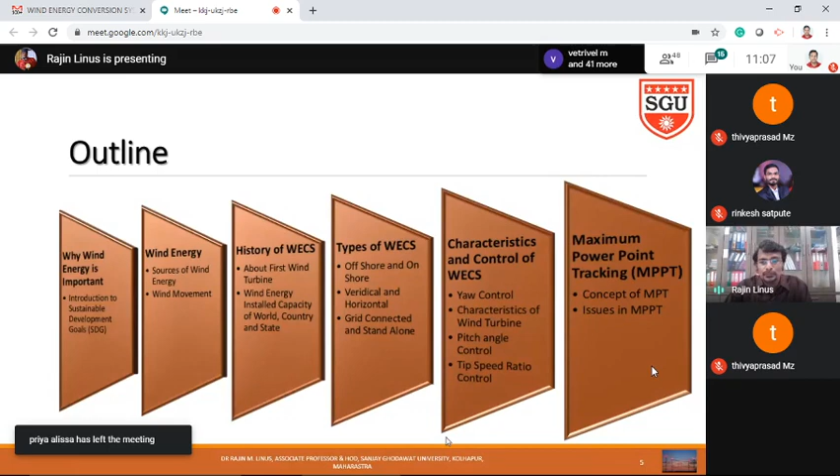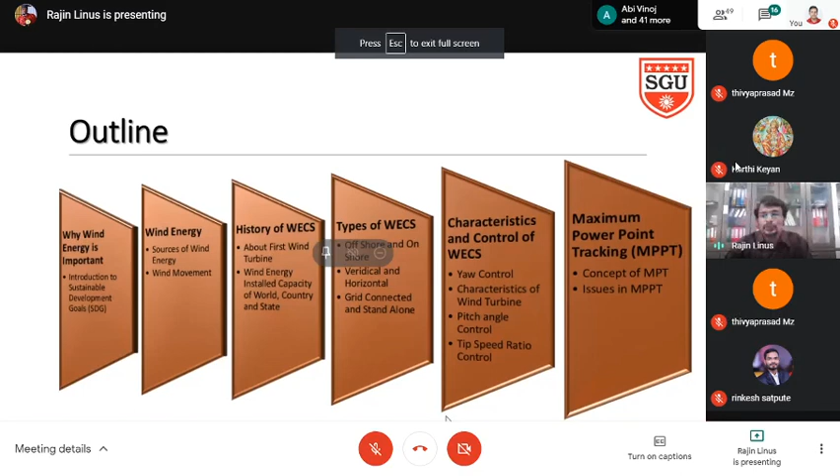Finally, the concept of maximum power point tracking and the issues in it. This MPPT is mostly related to the research point of view, so I have given a small introduction to what is meant by MPPT, and more literature is available for understanding different MPPT methods. Otherwise it would need a separate lecture, so I have confined it to some basic topics.

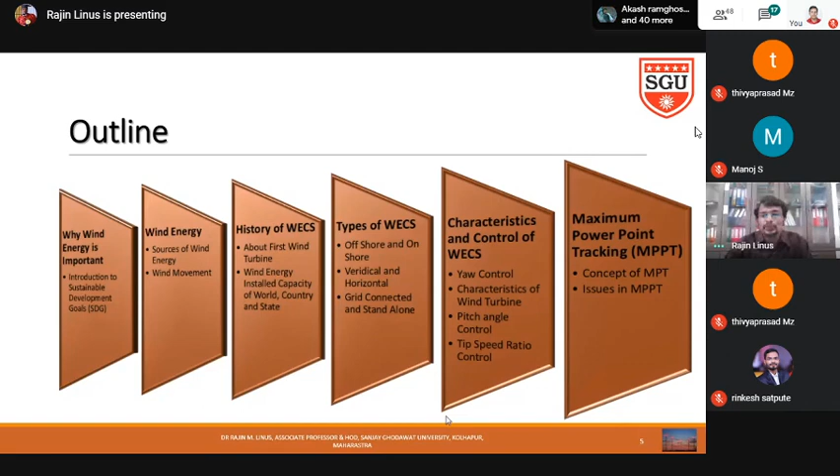First we should know why wind energy is important. We know the United Nations General Assembly is a combination of different countries joined together. They frequently meet to understand what issues exist and how to solve them. Even COVID issues were discussed there.

In 2015, they fixed around 17 sustainable development goals, in order to improve our world due to environmental and climate change issues. This includes reducing poverty, providing good food, and ensuring everyone gets electricity - different parameters are there. If you search Google, you can find all 17 sustainable development goals.

Among those, the seventh goal is clean energy, renewable energy. Its aim is to ensure access to affordable, reliable, sustainable, and modern energy - how much energy we can produce and give as clean energy. That is the seventh goal.

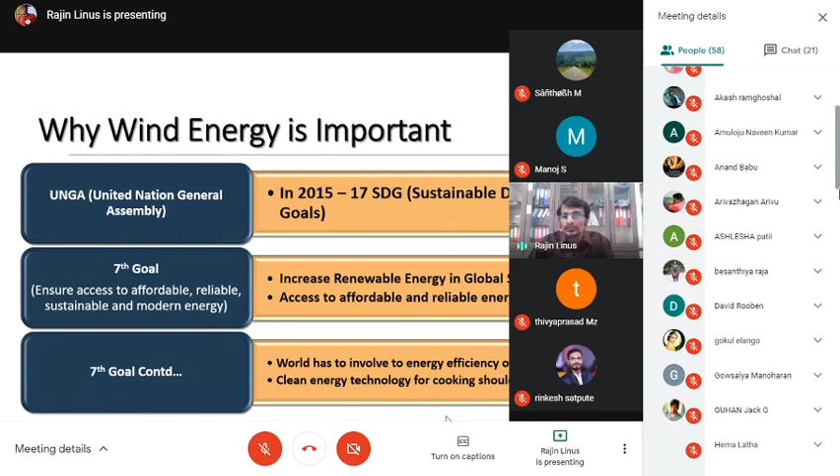As per the renewable energy point of view, they are expecting to increase the global energy share market by 2030. As per the renewable energy side, people are targeting that by 2050, 85% of power consumption should be by renewable energy. Nowadays electricity is very difficult to afford, so that type of thing we can avoid. Everyone should get the electricity, affordable and reliable energy by 2030.

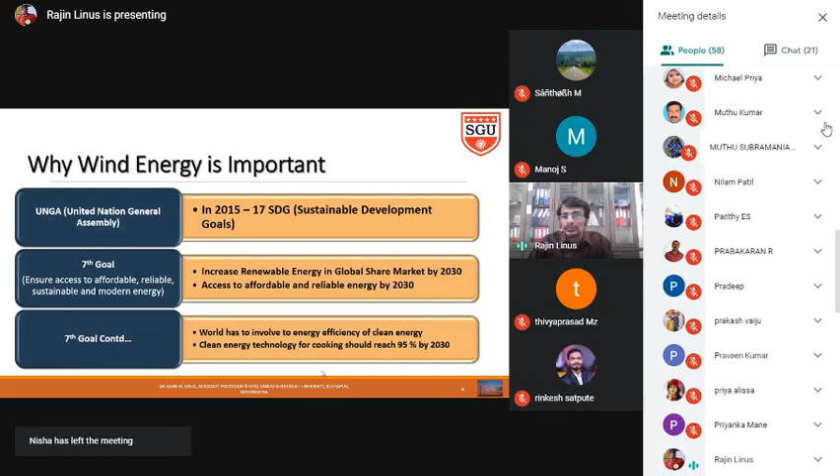Remaining can be taken from the grid, so that the scarcity of electrical supply also we can avoid. The world has to improve energy efficiency of clean energy. The efficiency is also an important factor for getting energy. How will we improve the efficiency? For example, as per the wind energy conversion system, we are giving input as wind, and we have to get good efficiency output. For that, people are using maximum power point tracking and different strategies as well.

Then people are targeting that by the year 2030, 95% of cooking energy should be by use of clean energy. So these are all the main impacts behind that, and that is the reason why I have also chosen this as a research area, and for today's seminar I have fixed this as the topic.

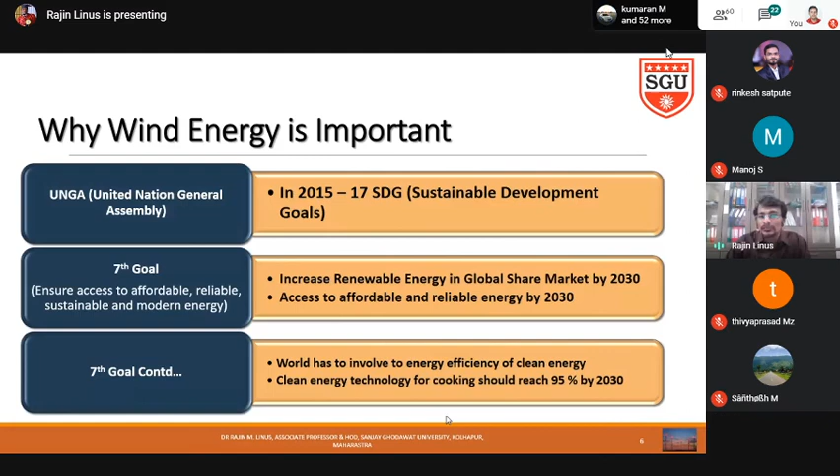Then, motivation towards this renewable energy system. I already told you about sustainable development. Why do we need this sustainable development? We already studied chlorofluorocarbons in 12th standard - fridges and air conditioners will produce fluorocarbons, and due to that the ozone layer is affected. Everyone knows this, but from a basic point of view, I am explaining this also.

We know the sun generates harmful UV rays. These harmful UV rays can be filtered by our ozone layer. This ozone layer will filter harmful UV rays and provide light for our survival, so the filtered light is transferred to our earth. This is the normal procedure - I don't want to go beyond the ozone layer and all that. The ozone layer has many chemical compounds, and these compounds filter UV rays.

If suppose the ozone layer is not there, these harmful UV rays directly attack plants and human beings also. Due to that, skin cancer and different types of skin issues and other health issues will happen. So now what is the problem? We are using electrical appliances which generate chlorofluorocarbons. Then volcanic eruptions will be there - hills and all will vomit heat and fire outside due to the metal content inside, and due to that we get a lot of smoke outside in the climate.

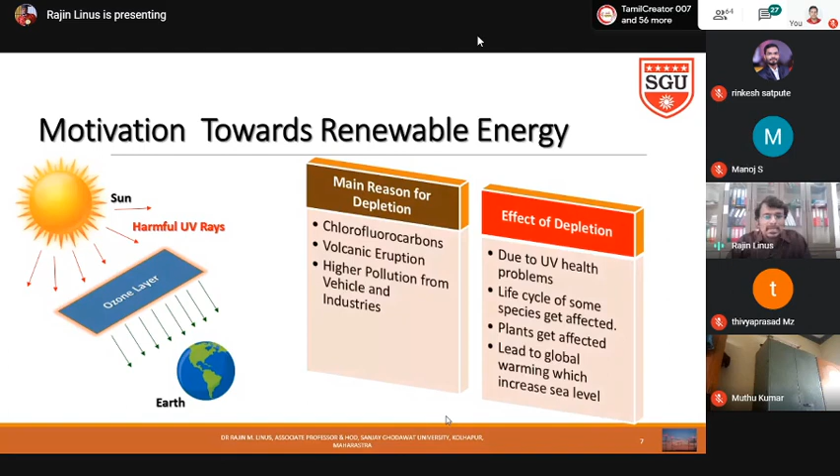So that is why I have chosen this motivation for wind energy as today's lecture. Then about wind flow, there is an interesting method. Maybe some of you are aware of how wind flow happens. What is meant by wind flow? We used to say changes of airflow between places is called wind flow.

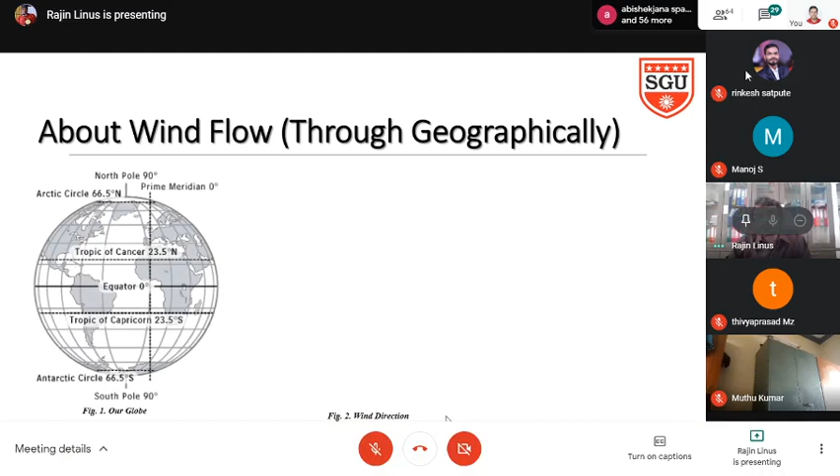For that, I want to show the geographical representation of our globe. North pole at the top, south pole at the bottom. If you ask more about geography, I am not so strong in it, but for explaining wind energy, I am explaining this. In between, the equator will be there - equator, north pole and south pole. Now just for understanding, I have split it to show north pole and south pole alone, with the equator in between. Assume morning time, the sun will be there.

So the sun will start to radiate heat. What will happen? This equator place will be heated up more compared with north pole and south pole. Once again, due to the sun's energy, the equator will heat up more compared with north and south pole. So the air, which contains liquid molecules and water molecules, everything will be there.

Once this water molecule is heated up, the higher density air will be at ground level. Once it heats up, warm air will come up, above the high density air. So what happens? This warm air will start to move towards the north pole and south pole.

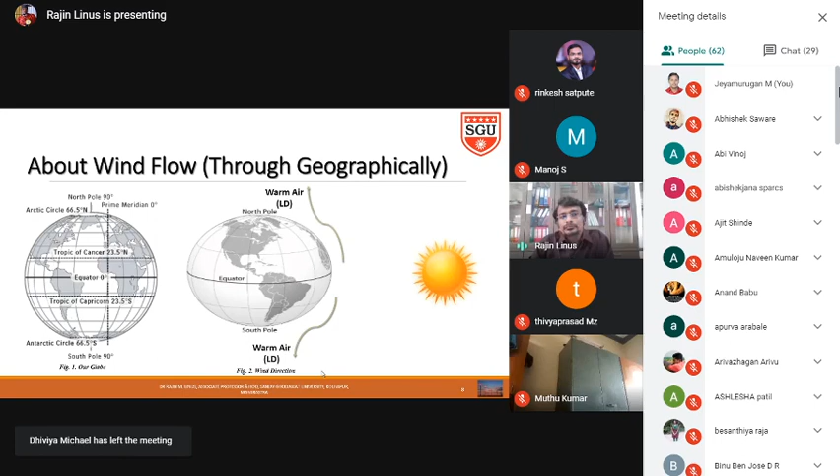I will show you very clearly. So now this is the case - once this heated up warm air... sorry, warm air will move from equator to north pole, and from equator to south pole.

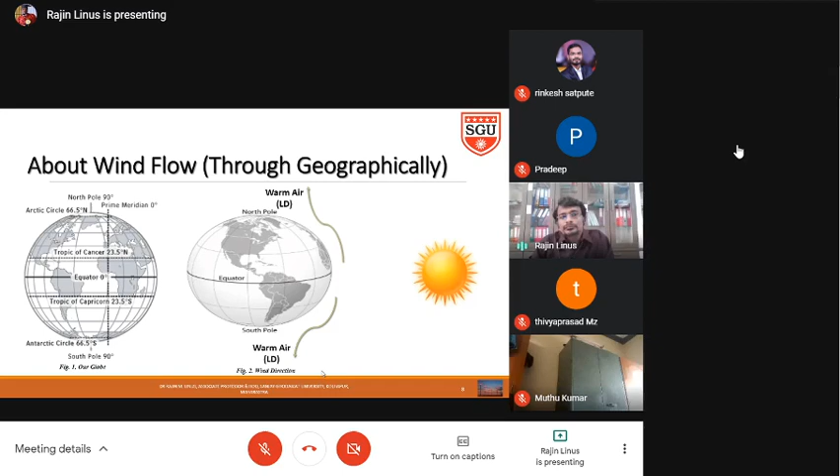So what happens? There will be a space created. This space at the equator will be filled by cool air from the north pole and south pole. Cool air has higher density; warm air has lower density. That's why it is mentioned as LD and HD. So cool air will move towards the equator.

Once again, once heat is generated from the sun, the equator side will be heated up. All the air content will be warmed up, so it will be low density. As the lower density air behaves like electricity - higher potential to lower potential - it will try to move towards north pole or south pole.

So now the equator is vacant, and that vacant place is occupied by cooled air from the north pole and south pole. So air will flow from equator to north pole, or north pole to equator, and so on, based on environmental conditions. This is the process of wind flow - this is why wind flow happens.

This is one factor. Second, nowadays in our area we can see hills everywhere. Hills will block the airflow, and due to that also wind flow will happen. This is another way wind flow is generated - based on geography.

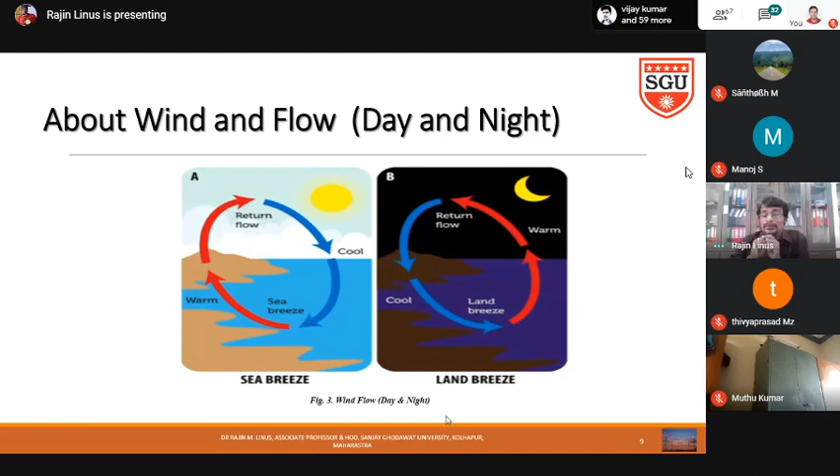One is, due to the geographical point of view, the equator will heat up more. Due to that, there is a wind flow. Then this is the case during the day and night time: due to the sea breeze and the land breeze, airflow will be there. Then another one, due to the hills and everything, airflow will be blocked and it will be deviated. So this is the case of wind flow in the day and night. I hope you understood what is meant by wind and how the flow will be.

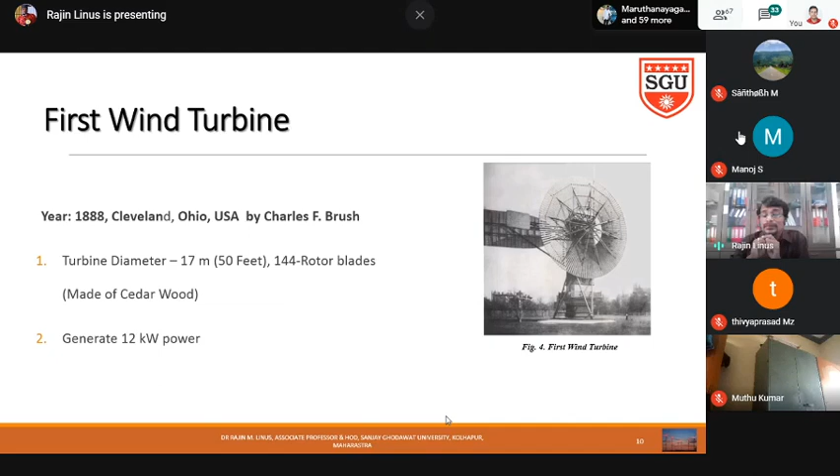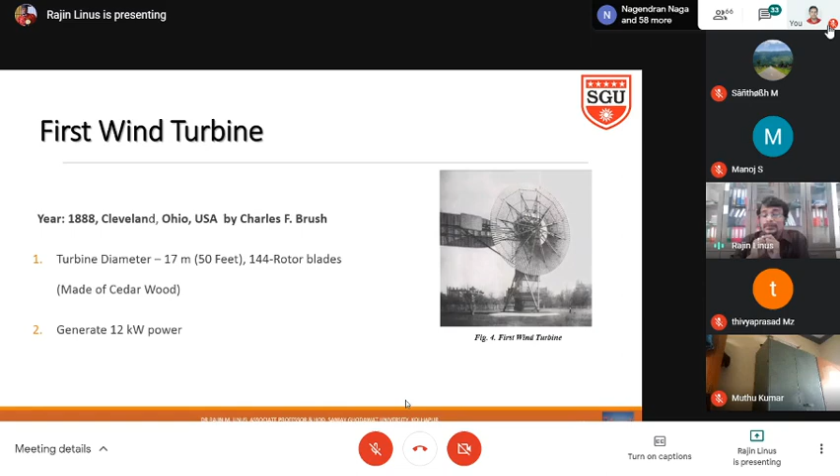Once people invented it, from this we can understand the disadvantage. From a construction point of view, it is very difficult. Even three blades take more time to elevate, and here we are using 144 rotor blades, the diameter is 17 meters, and we are getting only 12 kilowatts power. So once invented, people started to think about the negatives, and they started to introduce different things.

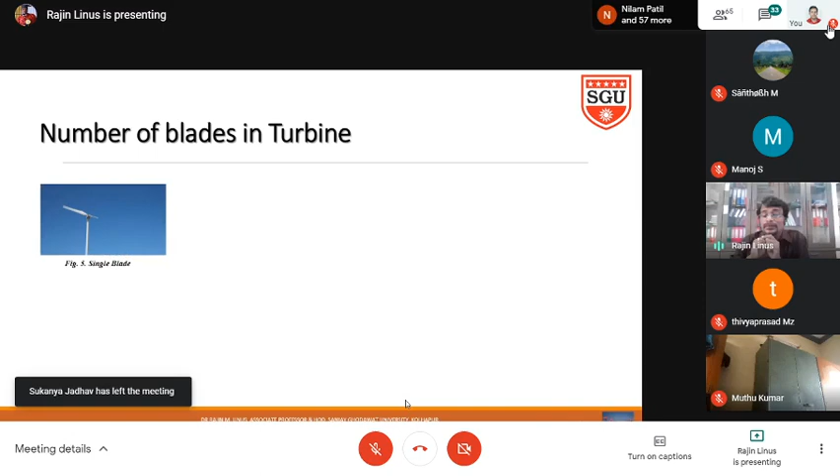Based on the number of blades in the turbine, first people thought of a single blade. Why can't we use a single blade? What is the problem? Analyze it. With a single blade, when it rotates, there will be centrifugal force issues, and balancing will be the problem. Due to that, they have to take special care about the construction of the base of the wind turbine. That is one case.

Second one is, if we have only one blade, we will not get more power. Wind power is more, and we have to extract maximum power. For example, an induction motor is there, we are giving input, output we are getting

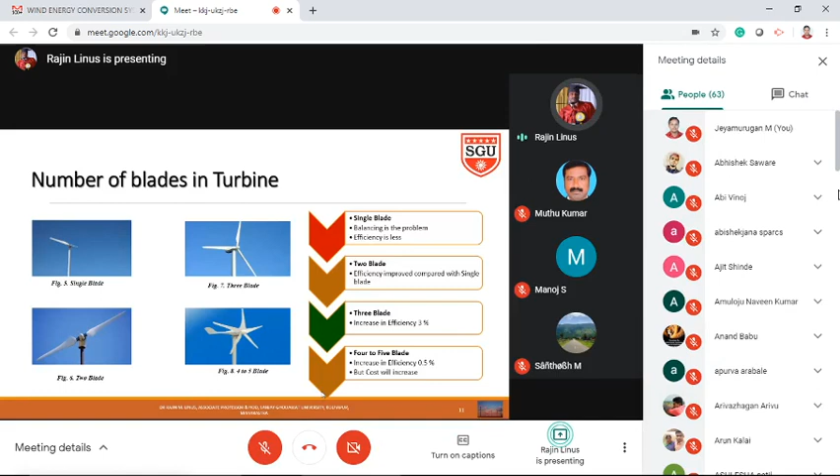only we have 3 blades. The reason is, if I go from 3 blades to 4 blades, the efficiency improvement is only 0.5%. But at the same time, the cost of installing one more blade is more. That is why for large wind turbines, people are not using more than 3 blades. But for smaller wind turbines, no issue. They can use many blades, and cost is not much of an issue.

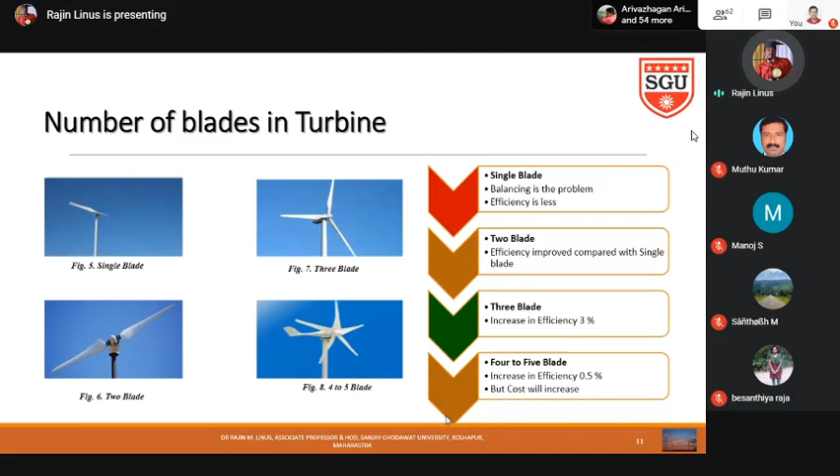So once again to repeat, the first wind turbine with only one blade had the problems of less efficiency and balancing. Second, they somehow recovered the balancing problem, but they thought they could improve the efficiency further. That is why they went for a third blade. With 3 blades, they improved the efficiency by 3%.

Then they thought of implementing 4 blades. The problem was the efficiency only increases by 0.5%. They were not able to increase it further, and at the same time the installing cost was more. That is why they have chosen 3. Nowadays we can see all wind turbines having 3 blades.

Then the world cumulative installed capacity of wind turbines, we should know. See, from 2000 to 2023, with expectations also. Initially, the world cumulative installed wind capacity was only 17 gigawatts. Then gradually it increased. In the year 2015, 64 gigawatts of additional new installation was done, so total 433 gigawatts. Then again 55 gigawatts.

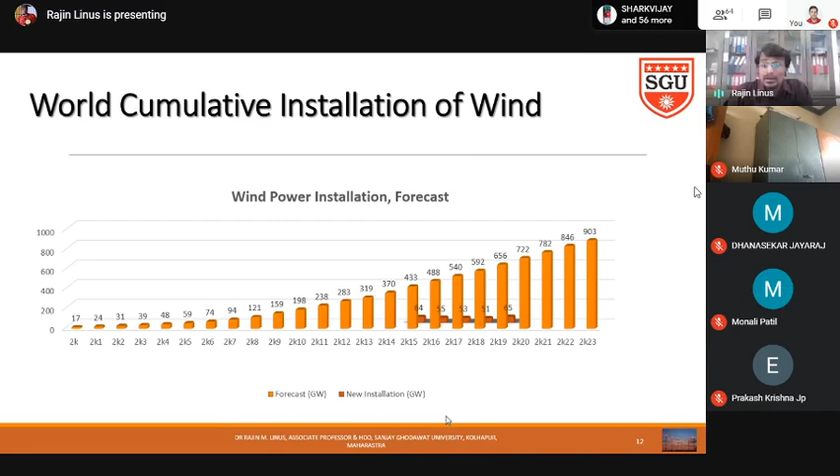Like that, they have increased new installations also. People are expecting that in the year 2023 there will be 903 gigawatts installed capacity in the entire world. So there is that much scope for electrical engineers also. Then region-wise installed capacity: Americas, Europe, Asia Pacific, Africa and Middle East.

When compared with other cases, Asia Pacific has 261 gigawatts of installed capacity, 44% of total installed capacity. Why is this varying? As I have told already: the equator, movement from the equator to the north pole and south pole, different areas having different environments for wind flow. Due to that, the changes are there.

If you go to our Tamil Nadu, we are the first. Tamil Nadu is the first in installation; I will show it in the next slide. If you go to Kerala, the installed capacity is very less. That's not the problem of the state's people, only the problem of wind flow. So these are the things we should know, how much they did.

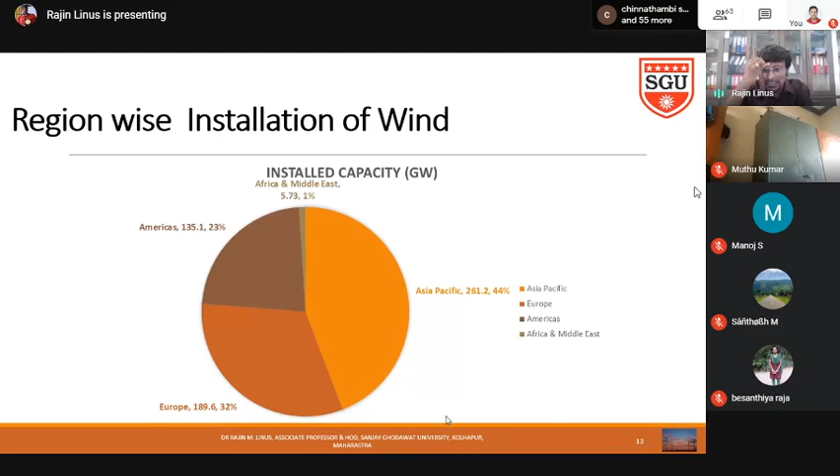So now the final one is state-wise installation of wind. I already told you Tamil Nadu is the first, 9 gigawatts. Then Gujarat 7.2 gigawatts, then Maharashtra 4.79 gigawatts, then Karnataka 4.75, Rajasthan 4.29, and like that. Finally Kerala is very less, 0.06. Then others totally 0.004, not percentage, gigawatts. So this is the installed capacity state-wise.

So one should know, before doing some research, how much impact it has on the world. Otherwise, final year students or BTech students, when you do some project, you should know what is the scope of your project.

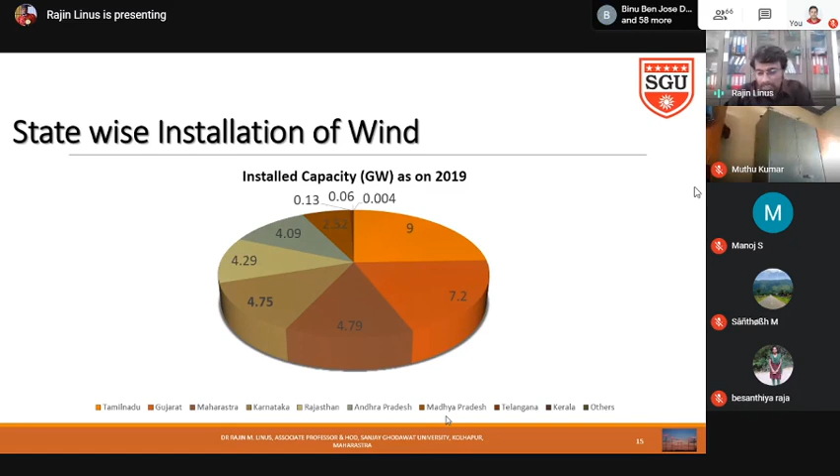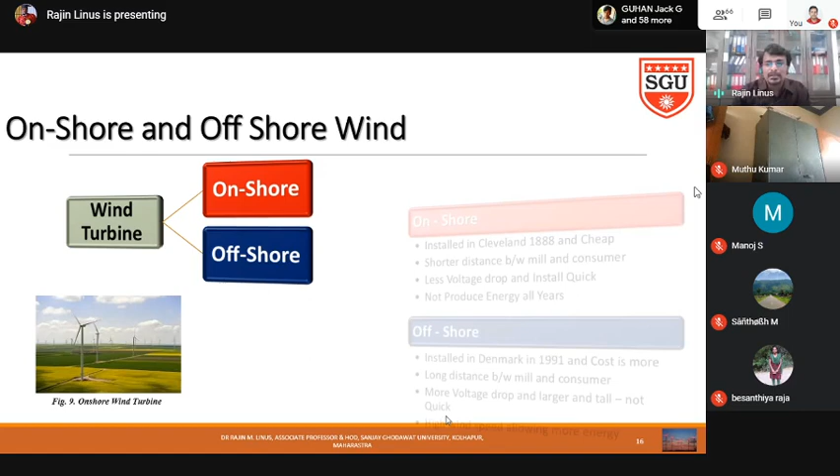Accordingly, you can plan. Then another one: onshore wind turbine and offshore wind turbine. These are the normal two types of wind turbine. Onshore means we are installing the wind turbine on the earth. Offshore means in the sea water. We will construct some ground there, and by using civil engineers we will make a strong construction there. So these are the two types: onshore and offshore wind turbine.

The onshore wind turbine was installed in Cleveland, as I already told you, in 1888, and it is cheap. Don't think cheap means it is very less; when compared with the offshore wind turbine, installation is very cheap. Then the distance from the generating station to the consumer will be very less: short distance between mill and consumer. As the distance is less, voltage drop will be very less, and we can install quickly. Install quickly doesn't mean within a day, but compared with the offshore wind turbine, we can install quickly.

Then, we will not get wind energy all the time. If we use the onshore wind turbine, it does not produce energy all year. Similarly, the offshore wind turbine was installed in Denmark in 1991; cost is more when compared with onshore. Then there is a long distance between the windmill and the consumer, so more wire, so that cost is also more.

Then horizontal and vertical axis wind turbines. Horizontal axis wind turbines we can see everywhere as usual. In the vertical axis wind turbine, the blades and axis of rotation are vertical along where we have placed it. In the horizontal axis, it is horizontal. So we should know the advantages and the impact of horizontal and vertical axis.

So in this horizontal axis wind turbine, wind flow should be in the right direction. That means every time we have to change the direction of the turbine based on the wind flow. But in vertical axis, if any one of the blades is hit by the wind, automatically it will start to rotate. So that is a drawback of horizontal axis when compared with vertical axis.

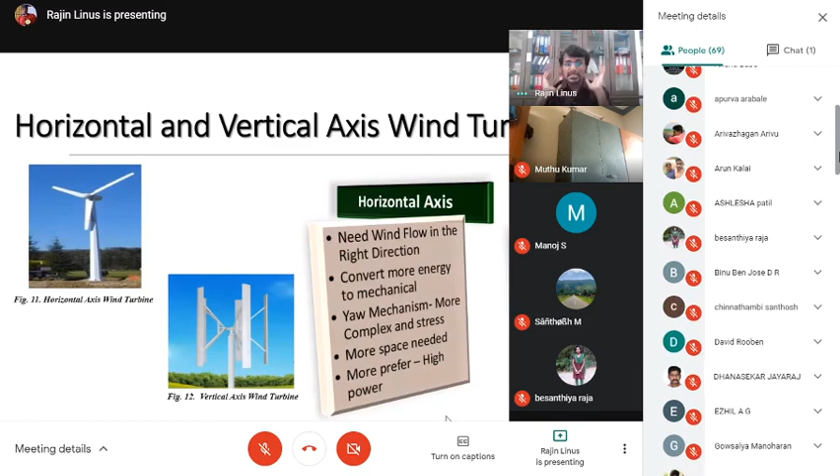In horizontal axis, all the wind blades need a force at a time, then only the wind turbine will rotate. But vertical axis rotates at any direction, only one is sufficient, no need to change the direction. Then which one converts more energy to mechanical? The horizontal axis wind turbine converts more energy. The reason is at a time all the blades will get the impact, so it will rotate, rotation speed and torque will be more, so we will get more power.

At the same time, vertical axis is capturing only one particular blade, so that it is rotating, therefore power production is less compared with horizontal axis.

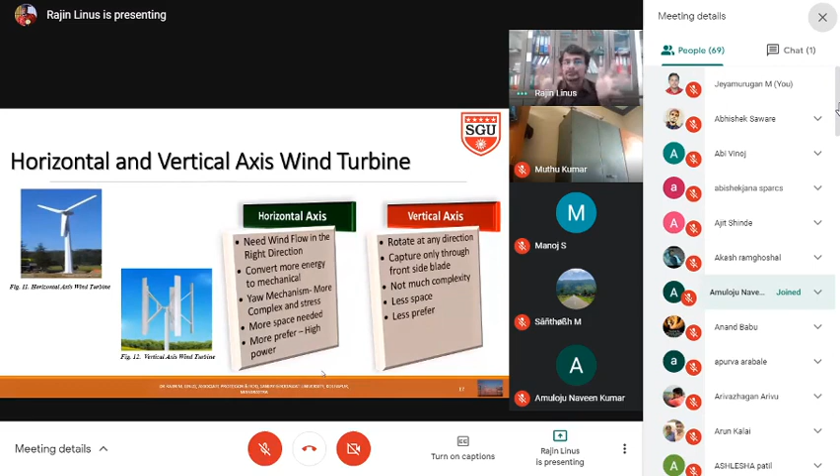Then yaw mechanism. I will tell you in the next slide also what is in the yaw mechanism. Just assume our pedestal fan in our home: if we need air in a particular direction, we will change the head. Like that, based on the wind velocity direction, we will change the head of the wind turbine. That is called the yaw mechanism. So yaw mechanism is needed in horizontal axis wind turbine. At the same time, vertical axis has not much complexity. Only one blade, if hit by wind, automatically it will rotate.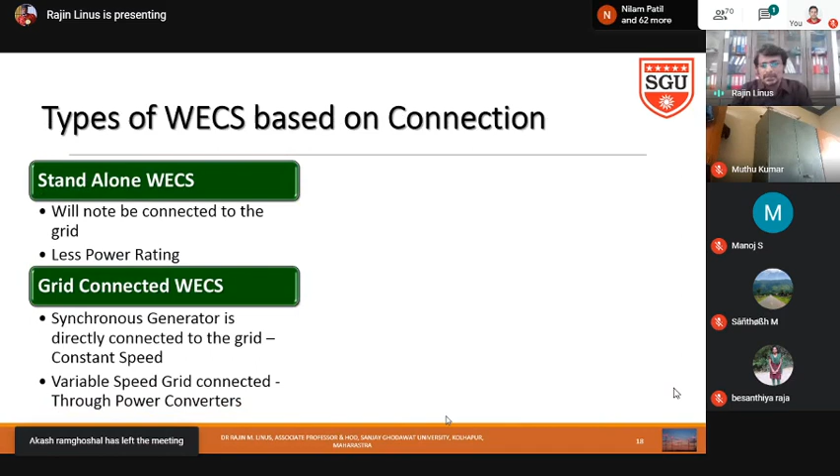Then types of wind turbine based on the connection: standalone wind energy conversion system and grid connected wind energy conversion system. The standalone conversion system means what? One wind turbine, power converter and load. In our home, we can connect one wind turbine. In some homes we have seen one small wind turbine with a power converter. It will fulfill the power requirement of that particular home, or some part of it. So that is called standalone.

Usually it has less power rating, so we cannot connect it to the grid. At the same time, multiple standalone wind energy conversion systems combined together may be suitable for things like the smart grid.

Then grid connected wind energy conversion system. What happens? Wind turbine, then permanent magnet generator. I have chosen permanent magnet for my research, that's why I have chosen this slide. So permanent magnet generator, then controlled rectifier. The wind turbine converts wind flow to mechanical output. Then the generator converts mechanical input to electrical output. The controlled rectifier converts AC to DC. Then DC is filtered by a capacitor.

I hope you understand. If any doubt is there, kindly note the slide and ask me during the discussion time.

Then the inverter, using sine PWM or space vector pulse width modulation. Then the output is connected to the grid, where we can connect load also. So in this system, suppose you are connecting an RL load in the grid. What happens? The RL load will draw reactive power. If we are not properly controlling the inverter, the grid will supply reactive power. If the grid is supplying reactive power, the power factor of the grid will also get affected, right?

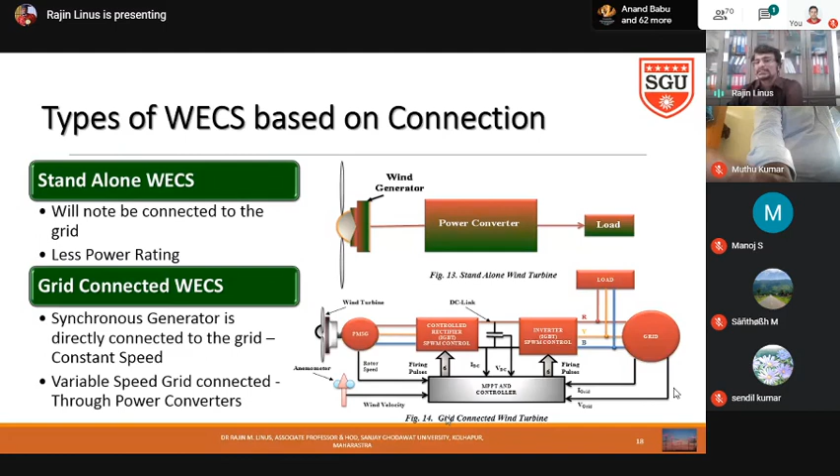So once again, to repeat: standalone is only for our personal purpose. Then grid connected: having a synchronous generator directly connected to the grid, we call it constant speed. Otherwise variable speed. Variable speed means in between the generator and grid we connect converters for controlling based on the requirement. Then parts of the wind turbine: we know rotor, blades, I don't want to say anything.

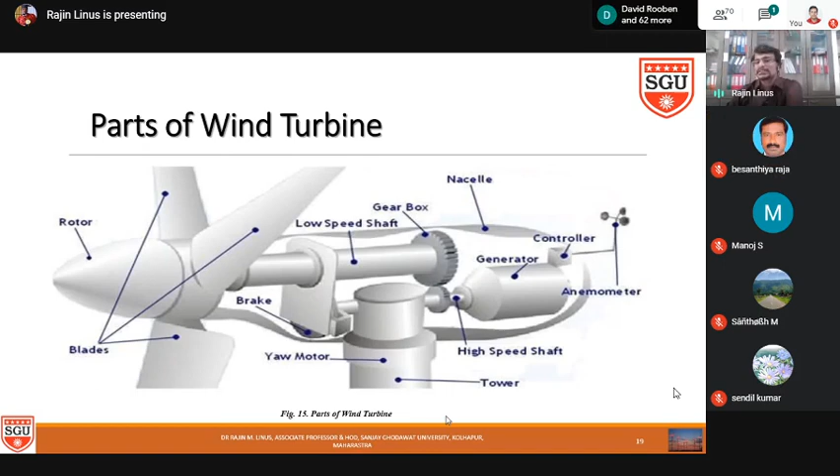Brake will be there. Sometimes if the wind flow is more, that time we have to apply some brake to stop it. Otherwise the wind turbine will be damaged, your generator will get damaged. So braking. Similarly, when wind power is very less, that time also braking is needed. Yaw control. See that tower

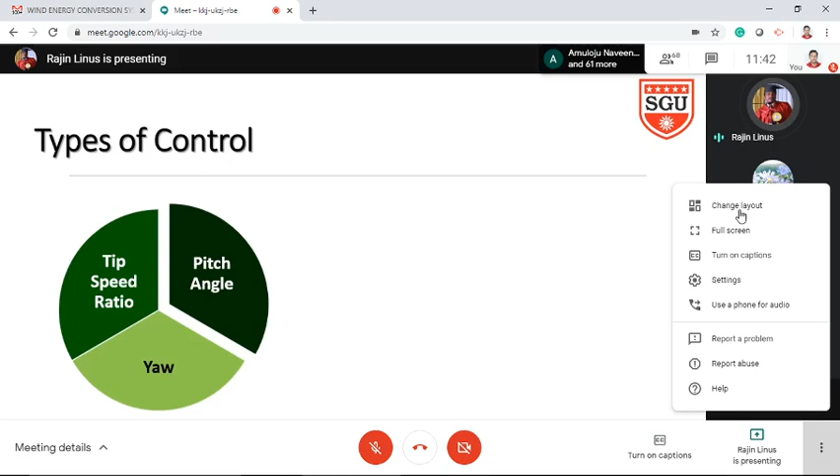So then types of control. We have three types of control: tip speed ratio control, pitch angle control, yaw control. First I will explain yaw control, then pitch angle control, then tip speed ratio control. You need to listen very carefully for understanding. I will show different methods to make it very clear, so just listen carefully so that you can easily understand.

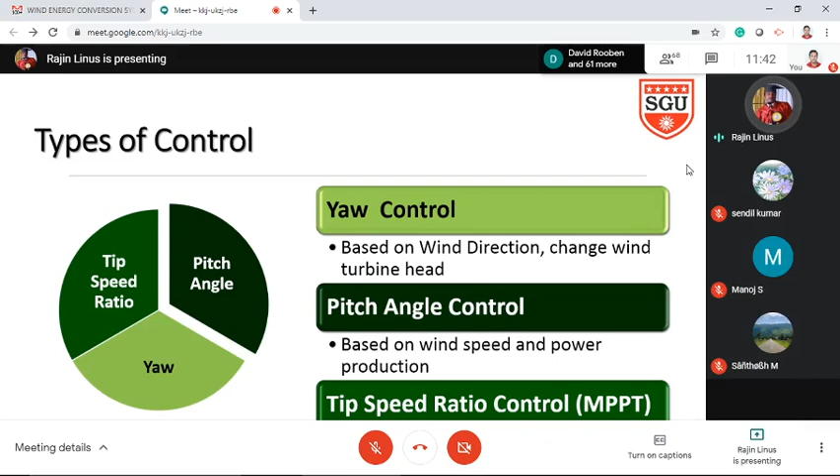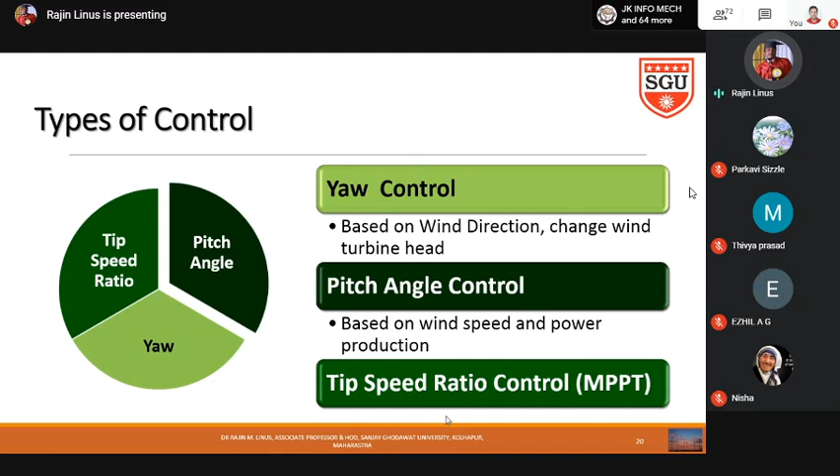Based on wind direction, change the wind turbine position. I already told you, when the direction changes, automatically we will change the head of the wind turbine. Then pitch angle control. Pitch angle control means each blade can be rotated. I will tell you why we are rotating further. Then tip speed ratio control. After explaining these two, I will explain tip speed ratio control.

See yaw control. See the direction arrow mark. I can tilt that entire head towards left or right, any direction based on the wind. If you see this closed image, there is some motor inside for making it rotate. I couldn't show the video now; online it is very difficult to show the video. You can see on YouTube some video showing there is one motor. With this motor it will automatically turn. The controller will give a command based on the wind direction and it will tilt. That is called yaw control.

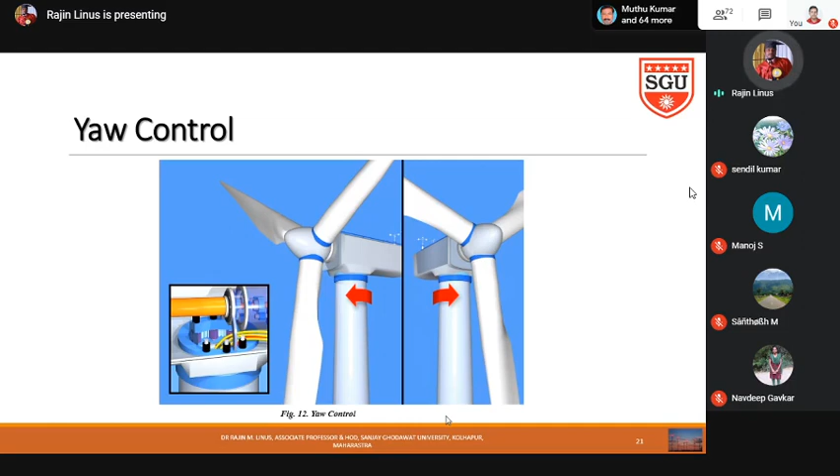Normally electrical engineers will not do much in yaw control; mechanical people only will do it. So I am not explaining much about yaw control. Then pitch angle control. See the blade. For each blade, the pitch angle can be changed. That is called the pitch angle.

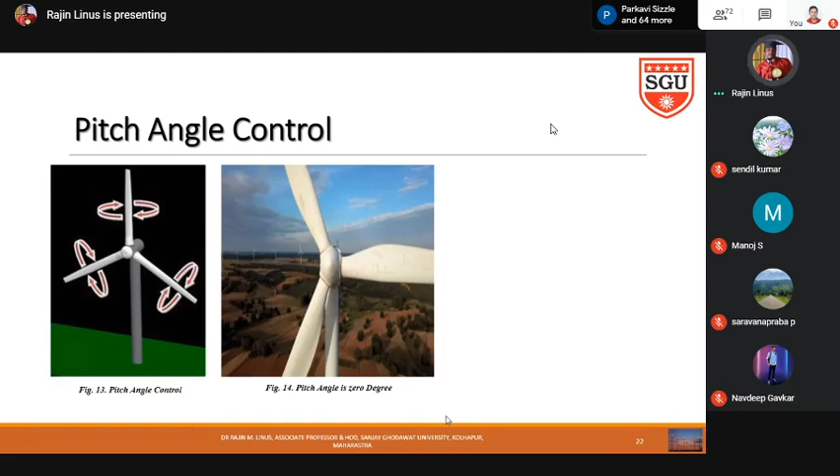Why is this pitch angle important? For that, see this wind turbine. Assume the icon that you are seeing on your mobile or laptop or PC is the direction of wind flow. That means wind is flowing from your eye to the screen. So now see, the blade is perpendicular. Whatever wind is flowing will be blocked by the blade, and the blade will start to rotate. Understand? This is very important.

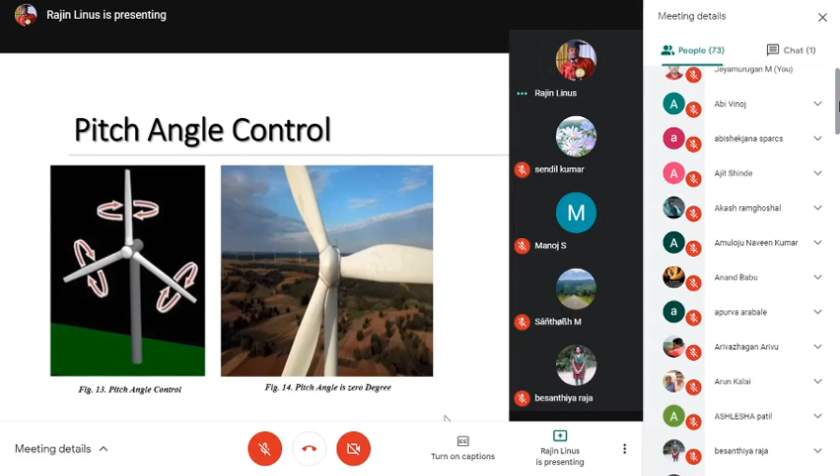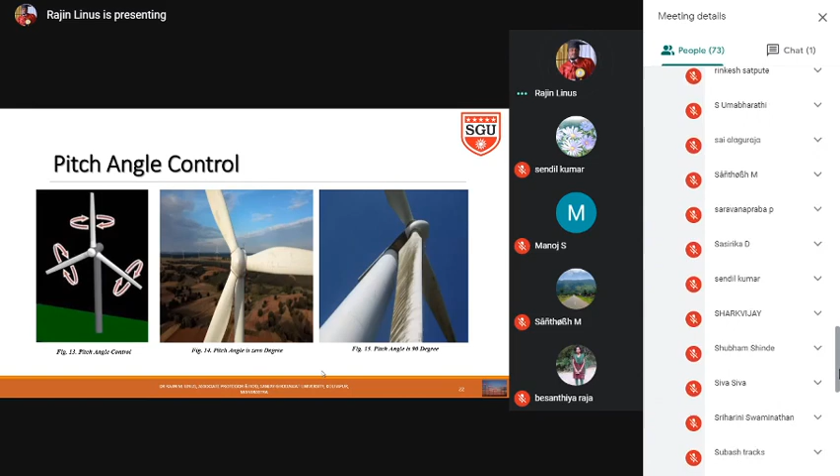When this, now assume the blade is in this position. See, it is targeting towards the head, like an aeroplane, one portion is there, that place it's hitting. What happened now? The blade is now changed. So the previous case we will call pitch angle 0 degrees. Please understand, the blade is perpendicular to the wind flow. That is called pitch angle 0.

Then here the blade is parallel with the wind flow. Blade is parallel with wind flow. That is called pitch angle 90 degrees.

Otherwise, if you have any problem understanding, do it this way. Take one paper and look at the paper. That is called a pitch angle of 0 degrees. Then look at the side view of the paper. What happened? At that pitch angle, we can see only a straight line.

We already studied engineering diagrams. So in the side view, we can see only a straight line. The straight line is called a 90 degree pitch angle. Facing directly to the plane is called a 0 degree pitch angle. So now you understand. When the pitch angle is 0 degrees and wind is flowing, what will happen? The wind flows directly onto the blade, so the wind turbine will start to rotate.

At the same time, if the pitch angle is 90 degrees and wind is flowing, what will happen? The wind turbine will not rotate. That means the wind direction and the plane of inclination are in the same direction, so it will not rotate. Then you should understand why we fix this: when we fix the pitch angle at 0, and when we fix the pitch angle at 90 degrees.

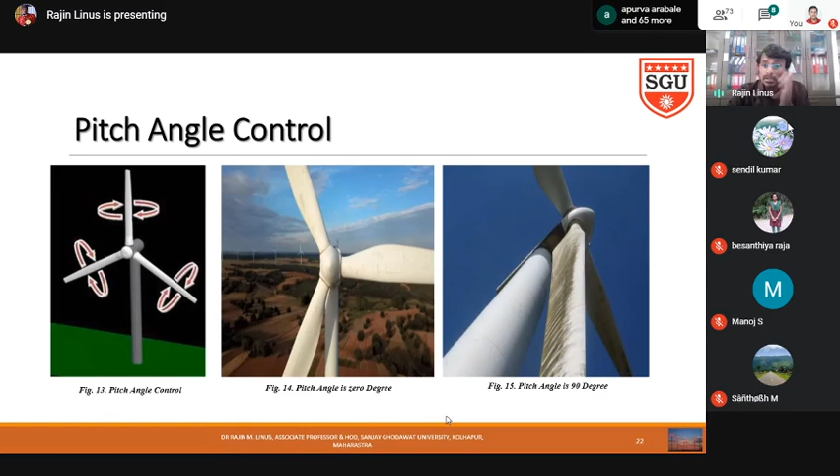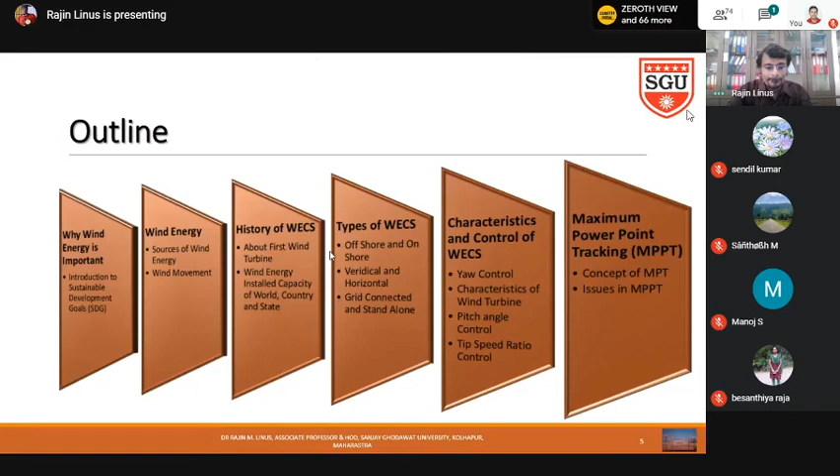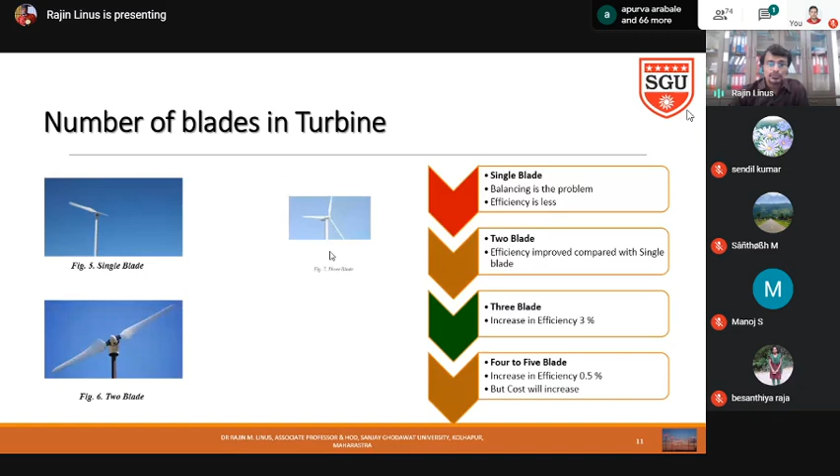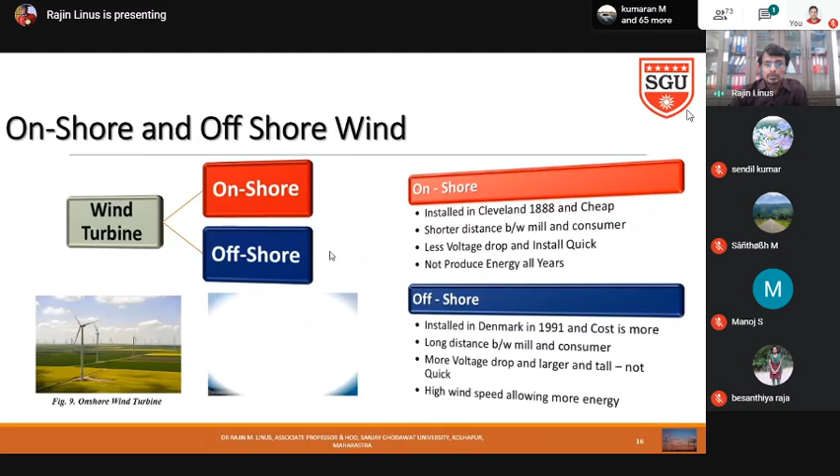Next, we are planning to move on to maximum power point tracking. So don't confuse with pitch angle and other controls. I am explaining maximum power point tracking, only applicable between cut-in speed and rated speed. Now our pitch angle is always 0 degree, please keep it in mind, otherwise you will get confused with whatever I am explaining.

Now I am going to explain the operating point between cut-in speed and rated speed only, so don't confuse with pitch angle. Between cut-in and rated speed, beta is always 0. So I can go with the characteristics of the wind turbine, between cut-in speed and rated speed. It seems to be like a hill.

See, V1, V2, V3 are increasing wind velocities, so we get a power curve like a hill. Now, if you see the output power, if I am not controlling the generator, and wind velocity is assumed V1, the curve is maximum whenever the optimum speed omega optimum 1 occurs, that time only we are getting P optimum, the maximum power.

Similarly, at wind velocity V2, omega optimum 2, that time only we are getting output power P optimum 2. So each wind velocity has a different optimum speed. If I am not controlling my generator, what will happen? Generator will rotate at any speed. For example, at wind velocity V1, it will not rotate at omega optimum 1. Instead, it will rotate less than omega optimum 1, so we cannot extract maximum power. That is why people have introduced maximum power point tracking.

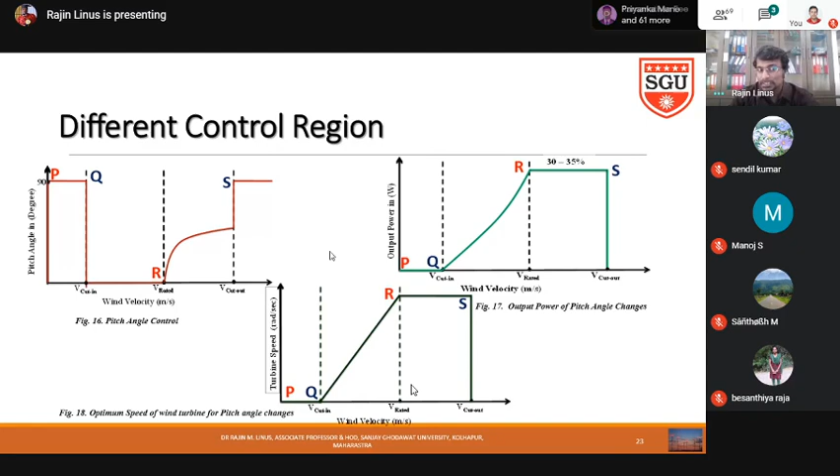It varies with respect to lambda and beta. I forgot to mention in the previous slide, I had told you about pitch angle control and yaw control, right? Tip speed ratio control is only applicable for the region between Q and R. I will tell you why I am choosing tip speed ratio control. Pitch angle control I already explained, yaw control is already explained.

So now see this slide, yeah, power. Lambda is nothing but the tip speed ratio. Lambda equals omega R by V, where omega is the speed of the turbine, R is the radius of the turbine blade, and V is the wind velocity. Here R is not in my hand, the radius is fixed. Wind velocity is also not in my hand, it is in the environment. So only lambda can be varied directly by speed.

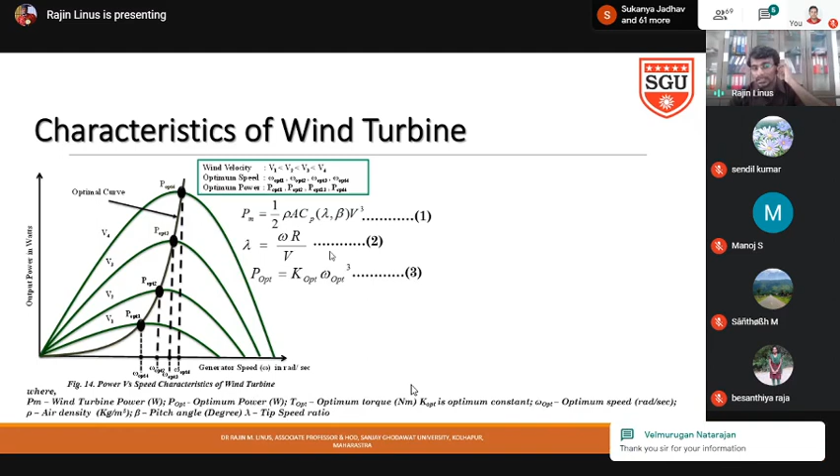So the speed is controlled, so that automatically lambda is controlled. Lambda is controlled means what? Lambda is nothing but tip speed ratio control. So now, let me show everything clearly. Air density is normal. See the first equation, half rho, where rho is air density. In normal cases, air density is 1.2 kilogram per meter cube, so we can fix air density as constant.

Then the second one, area, the swept area. Swept area is pi r square, so pi r square is also constant, since the radius of the blade will not change every time, it will be fixed. Then Cp of lambda comma beta. What is beta? Beta is nothing but pitch angle. In our case, pitch angle is 0. So Cp is only a function of lambda. Please try to understand, Cp is only a function of lambda, and V is the velocity.

So now from the second equation, if you substitute wind velocity V equals omega R divided by lambda, we automatically get the power equation in terms of speed. So again, half rho is constant, area is constant, the only variable is Cp of lambda comma beta. Cp's only variable is lambda. How does lambda vary? Only by speed. From this equation, the only variable is speed, since R and wind velocity are not controllable by me. That is why I mentioned tip speed ratio lambda and pitch angle.

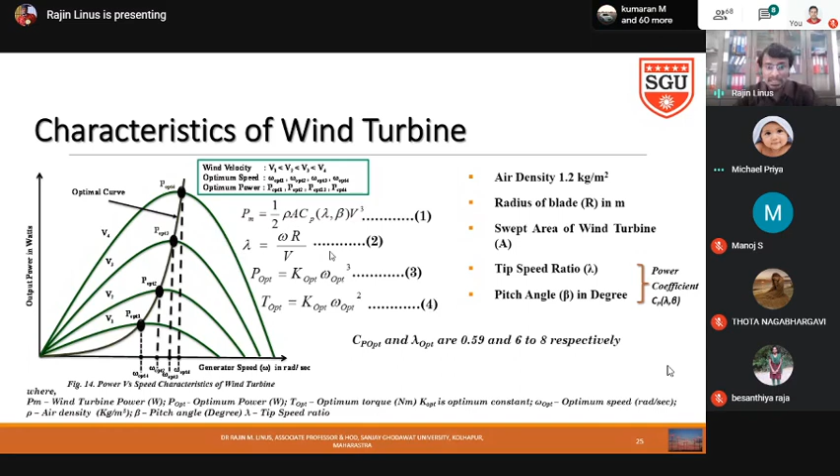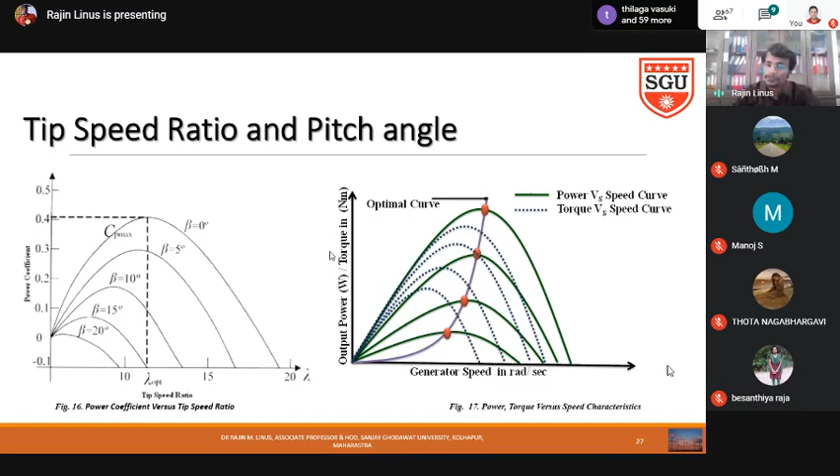Then, as per equation 4, the green line in figure 17 is the power versus speed characteristic. The blue dotted line is the torque versus speed characteristic for the wind turbine. Either we can vary the torque or we can vary the power; accordingly, we can change the speed. If we change the speed, the tip speed ratio will be optimum. If beta is optimum and the tip speed ratio is optimum, the power will be optimum. That is just for understanding and showing it.

I hope you understood why we need to go for maximum power point tracking. Why do we need it? Output power is a function of the power coefficient. The power coefficient is a function of lambda comma beta. Lambda is nothing but the tip speed ratio. Beta is nothing but the pitch angle. Already we have chosen the speed region between V cut-in and V rated, where we fix beta equal to 0. The only variable is lambda.

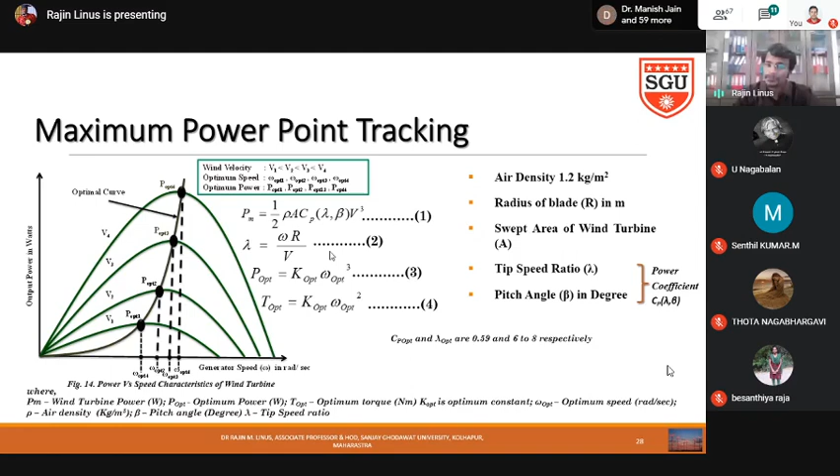How will we vary lambda? Only by varying the speed, since V is not under our control and R is fixed. Therefore, lambda varies only by speed, so that we can get the optimum. So we get the third equation: power optimum equals K optimum into omega optimum cube. I will explain only one algorithm, not more.

Hill climb searching algorithm. In the hill climb searching algorithm, we have the generator and power converter, output load, feedback. I have taken power, then an error detector, then feedback. I will first explain what is meant by hill climb; only then will you understand this.

If you are climbing the hill, you will climb one particular time and you will look down, and you look above whether I have reached the maximum optimum, the top of the hill. If I am not reaching the top of the hill, then again I will walk forward one particular time, then I look at the top; when it is down, we will come to know, yes, I have now reached the top of the hill.

Similarly, initially by using this closed loop control, we will see the delta omega in figure 20. We will increase the speed a little bit. Check the power. When compared with the previous power, is this power increasing or not? If yes, then increase the speed again further. Again check current power and previous power. Again the change in power is positive. Like that, we have to reach the maximum point. This is called the hill climb searching algorithm.

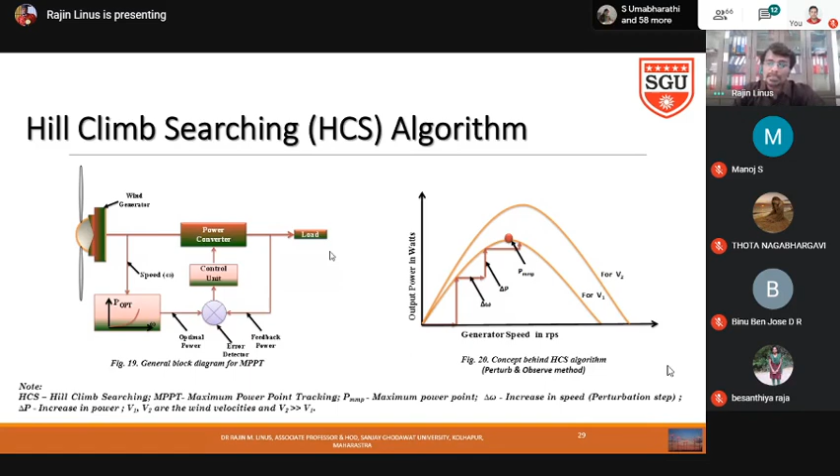I hope you understand. Just assume the hill climb, how we are climbing. Just climb and look down, look up, yes, we have to move further. Then again we will go further. Finally at the top of the hill, when we look further, we cannot see any top. We can see down. So we call it the hill climb searching algorithm. In this hill climb searching algorithm, this is the demo. We will check the power every time based on the speed changes.

There are two types of hill climb searching algorithm: small step hill climb searching algorithm and large step hill climb searching algorithm. Small step hill climb searching means we will increase the speed in small steps. What happens if you are walking with very slow steps? Reaching the hill will take more time. At the same time, the accuracy of reaching the maximum point is the exact optimum point. That is the advantage of small step tracking. We take small steps and reach the maximum point, but the speed of tracking is slow. At the same time, accuracy is more. That is called small step tracking.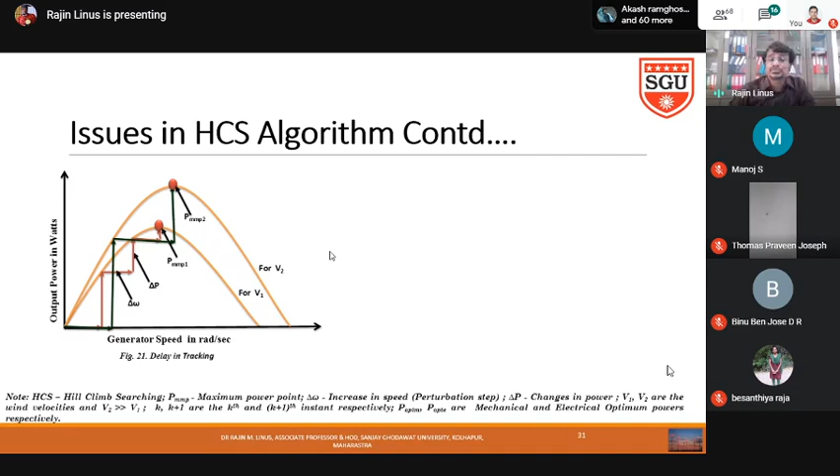Then there are issues. For one particular wind velocity, first we will increase using small steps. We have reached the point PMMP1 first for wind velocity V1. Then if wind velocity changes to V2, what will we do? Again we have to start from the initial point. That is the disadvantage people have found in the issues of the HCS algorithm. That is one issue. Another issue is sensorless control.

In sensorless control, what happens? Initially, it reaches PMMP K. Now, as wind velocity increases, the optimum becomes PMMP K plus 1. But the algorithm thinks, oh, the speed increases, so I have to track further. So unknowingly, it will go on another track beyond that optimum point. Initially, it reaches PMMP K, the optimum point, using this tracking. At one particular time, suddenly, wind velocity changes, so now the optimum point is PMMP of K plus 1.

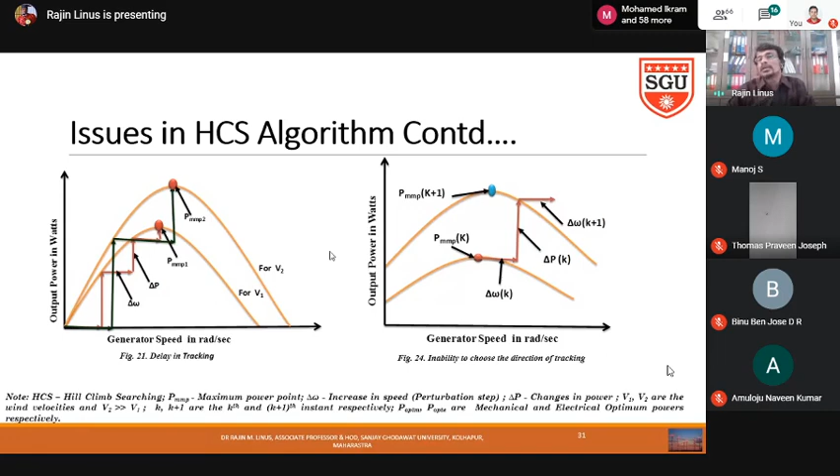But the algorithm will think that now power is again increasing. That means the previous optimum point is not the optimum point, so I have to increase the speed. So the algorithm increases the speed by del omega of K. So it will not get the exact optimum point. These are the issues behind the hill climb searching algorithm. People are doing different research activities.

Then another one is the optimum constant. We will have one optimum constant. What is the optimum constant? P optimum equals K optimum into omega optimum cubed. So if you measure electrical power, what happens with the electrical time constant? First the generator will be there.

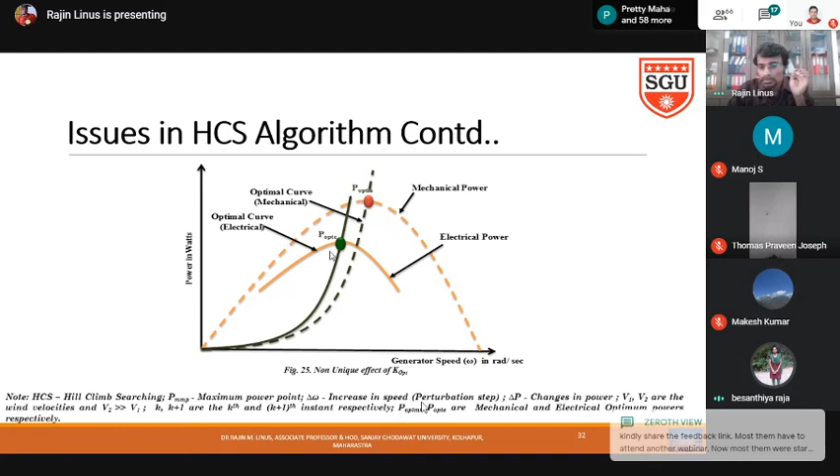Sorry for the interruption, sir. I think time is 12:23. Time is already finished. Yes, sir. Yeah, what happened? Okay, I will go further. So the last slide will be the wind-up.

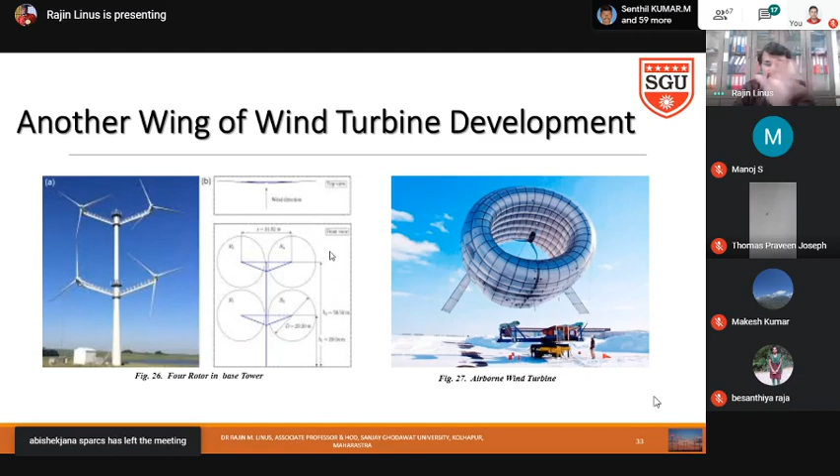So another thing is the multi-rotor wind turbine. Instead of one rotor, we have 4 rotors at a time. This is also one literature. Then development of wind energy. Then another one is the airborne wind turbine. They will make one small turbine and they will fly it out, so that wind turbine will rotate. That is airborne wind. So these are all the scopes for electrical engineers, and from a research point of view one can work on this.

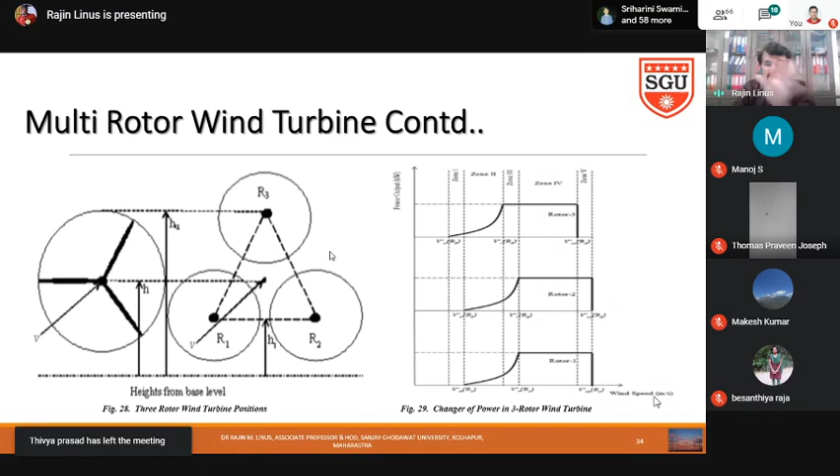So this is the characteristics of the multi-rotor wind turbine. Instead of one big circle, we are using small ones. Instead of 30 megawatts, we are using 10, 10, 10, three wind turbines. This is called a multi-rotor wind turbine.